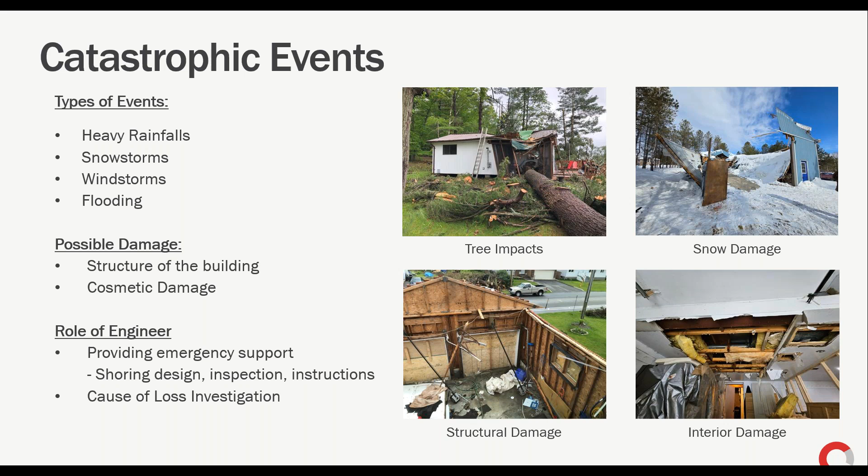Let's start with our first case, which actually happened this year. Last month in February, a large barn in Huntsville, Ontario collapsed after multiple snowstorms. The building was almost 100 years old, a really old building.

In cases like these, assistance from a contractor is really necessary to help with the investigation, because sometimes we may need to temporarily shore or support the building to be able to remove some of the debris and collapsed materials to inspect them. This, of course, costs some money, but it helps the investigation ultimately.

During the inspection, we had a general discussion with the building owner at the beginning, and the owner mentioned that the snow usually just slides off the roof and doesn't really build up, but they stated that the barn just collapsed right after the snowstorms, basically indirectly blaming it on the storm.

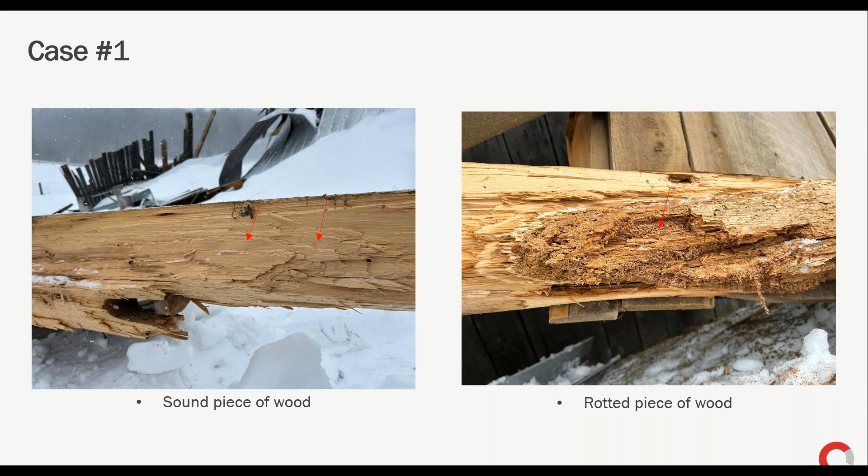By digging deeper into this and doing a more comprehensive investigation, we were able to identify the pre-existing deterioration and decay, and determine the root cause leading to this collapse. The snow load only acted as a trigger, but the underlying issues had actually been there for some time. This case highlights how surface observations don't always tell the full story.

Our next case is actually another snow claim from this year in February. This was a seasonal cottage in Gravenhurst, where the owners only visited occasionally. Their neighbors started noticing that the roof was sinking in some areas, the walls were leaning, and the building looked like it was twisting somehow. So they notified the owners, and when we were asked to inspect the property, we checked how much snow this area got in January and February, because the exact date of the incident wasn't confirmed.

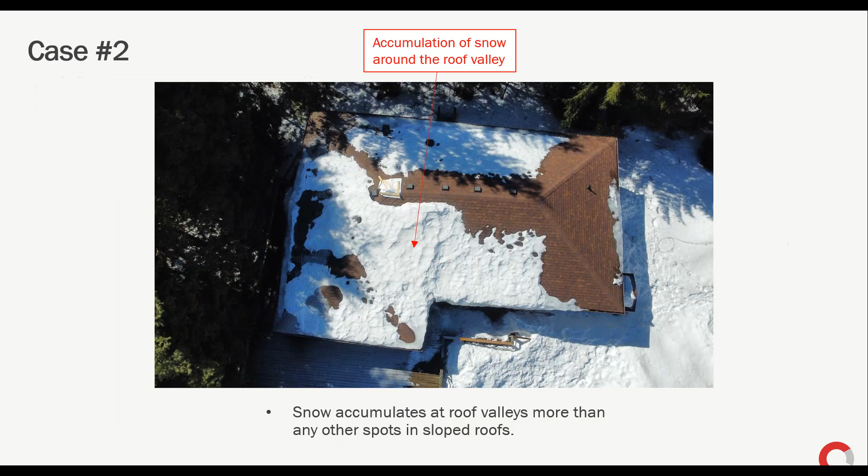Not necessarily. Some trees, large trees, only branches sometimes fall, and even just a branch could cause damage to a building or a roof structure, but not necessarily that certain trees are more prone to fall than others. I wouldn't be able to confirm this for sure, I'm not an expert in trees. Maybe an arborist can. But anecdotally, you haven't seen more of one tree falling than another? No.

This also came in during the first case study: what was the stated root cause of the collapse? Was it the snow or was it the deterioration?

So the stated root cause was actually the snow. The owner made it clear that they are claiming this because of the snowstorms that happened in February. We agree that the snowstorms were actually excessive, we got a very large amount of snow in a very short period of time in February specifically.

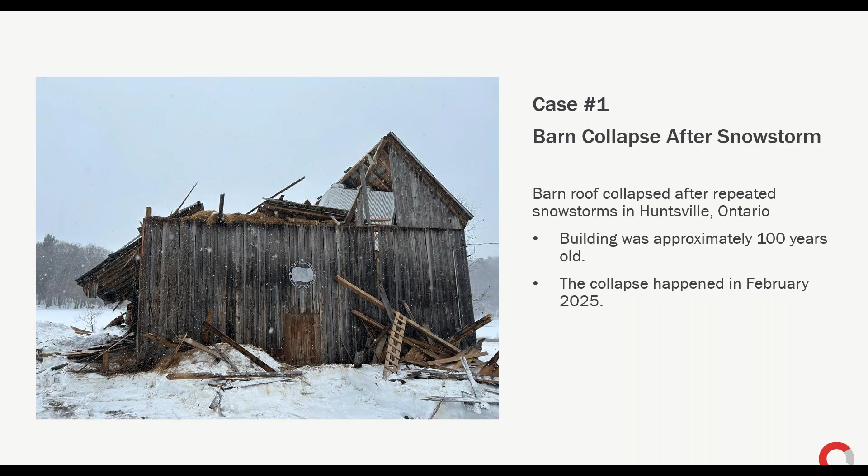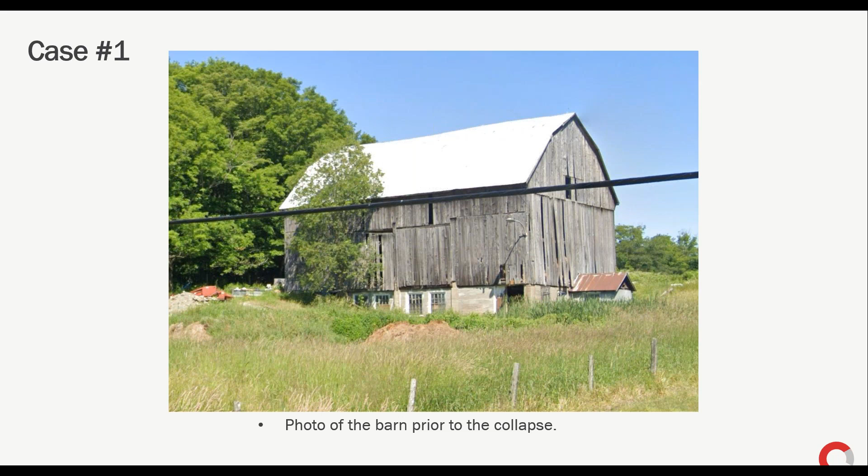But think about it, the building has experienced a very large amount of storms over the years. How come the building just collapsed now? Especially since the roof slope was very steep, as we're looking at in this picture, and the owner himself confirmed that snow doesn't really accumulate on the roof. It's just that the snow would have been a trigger to show all the issues that the building already had.

If the building didn't have all of this deterioration, insect damage and decay, it wouldn't have collapsed. So to be clear, the owner stated that it was due to the snow, but your findings showed that the snow was a contributing factor and maybe the final straw, but not the root cause. Not the root cause, yes. Okay, that's perfect, correct.

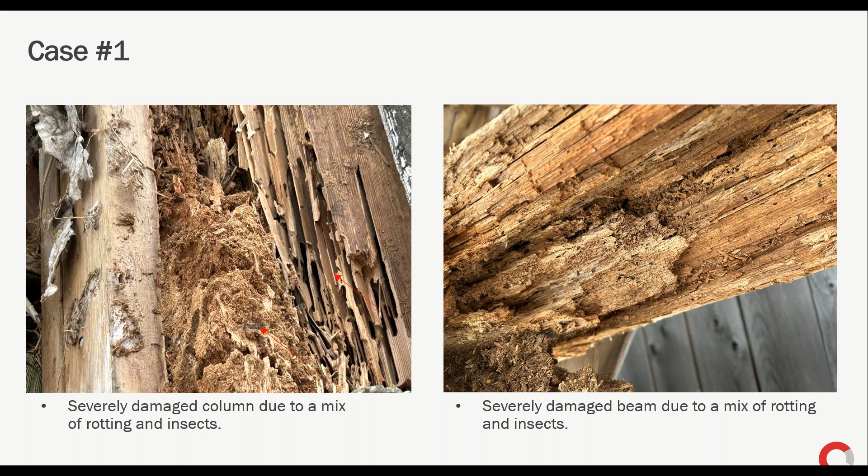This one came in during case study number 2. This might be somewhat anecdotal in terms of your answer, but would you say that metal roofing is better than an asphalt shingle roof for getting rid of snow or preventing buildup? The issue with metal shingles is that they are not very good with low slope roofs.

Metal roofing is ultimately better than shingles in general, and it has a much longer lifespan, and snow slides much faster off metal roofs than shingles. But at the same time, we've also seen cases of buildings collapse even when they had metal roofing. Just to answer the question though, yes, metal roofing is ultimately better, it has a much longer lifespan than shingles, and less maintenance may be required as well. But I think the question referred to whether snow would be more likely to slide off a metal roof and not build up.

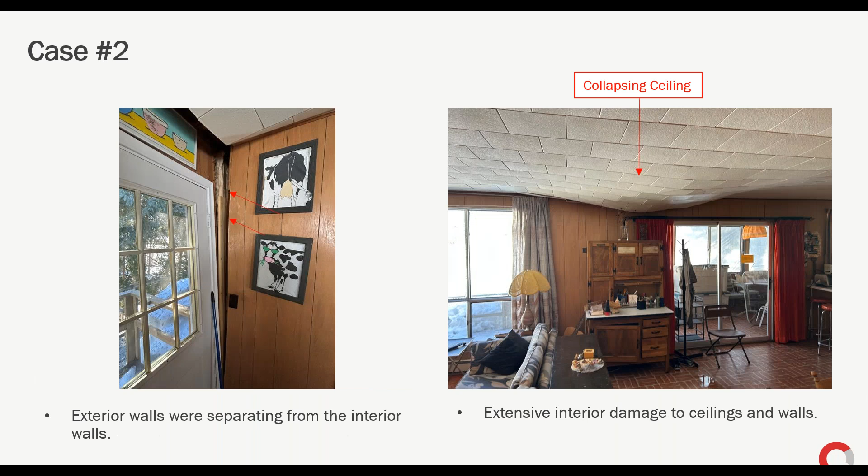Thank you. This is referring to the last case study, the cracks in the foundation. What was the remedy for the house in the end? Unfortunately, the issue is that these cracks will keep extending.

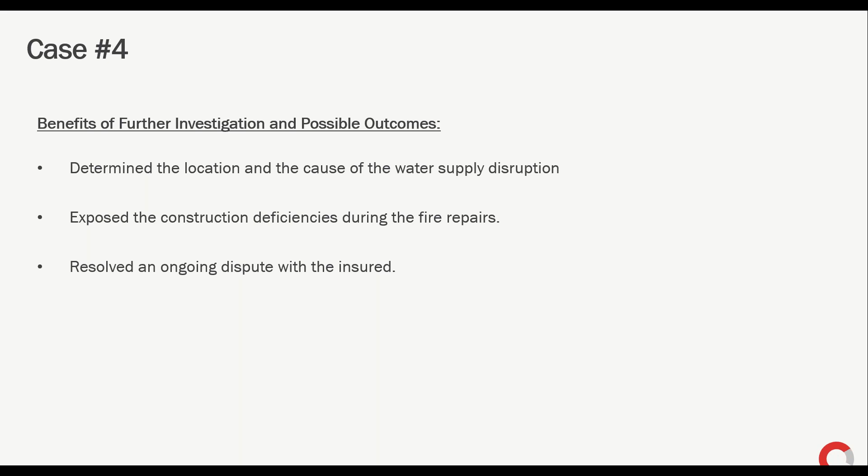If the slab doesn't get changed and a proper slab, thicker maybe or more reinforced, is installed, cracks will always happen, cracks will come back. So the entire slab, unfortunately, would have to be removed and reconstructed properly, which is a major job because this basement was finished and it would have been a large amount of work to do. So the proper remedy is actually to rebuild the slab, which is doable without having to do major demolition in the house. It's just the slab itself would have to be repoured properly because these cracks will only get worse.

Think about it as you'd think about a pool. A fiberglass pool, for example, the only way to keep it in the ground is to fill it with water. So if the pool has no water in it, it will start cracking instantly because it can't resist the soil pressure, and if there's groundwater, it would make it even worse. It's the same for the house and the foundation and the slab of the house. Think about the foundation and the slab as the pool, and the house structure above it is actually the water that keeps it in place. So if there's no resisting load from the house itself to resist the hydrostatic pressure...

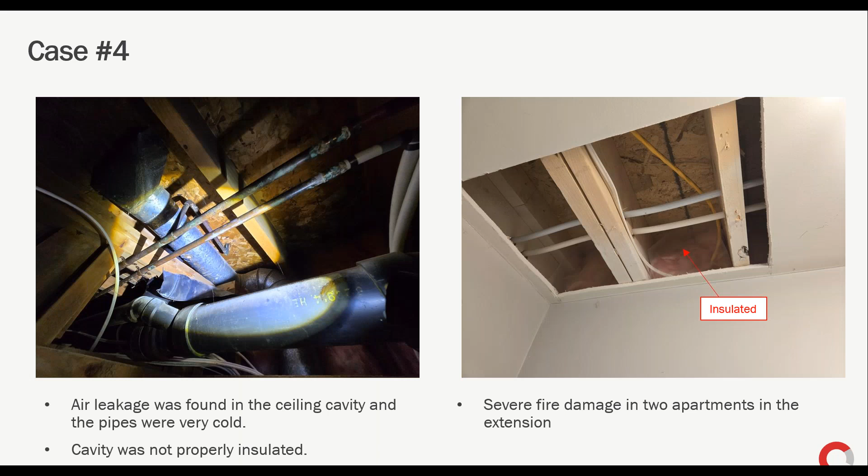Here we go. In the case of the home with the plumbing issue, this is the one with the freezing. Why would this only have started occurring? Oh, I think this is just some confusion here - why would it only have started occurring after 8 years, or was it happening right away? No, actually the homeowner reported that it started happening right away. It would happen every winter, but only when temperatures were very low. But it didn't happen like 8 years after - no, maybe I wasn't clear about this. They said that this was happening for the past 8 years, right after they moved into the house, after the fire repairs were completed.

Okay, yeah, I thought that was what the case was. Okay, thank you.

Case study number 3, which is the drain. The drain, yes, yes.

What was the cause of the damage to the ceiling on the level below the top level? The water, or the drain, was leaking for a very long time. The drain didn't just start leaking in this storm - we actually found mold damage in a lot of the interior walls on this level. So the water was actually draining through the walls and going down into the ceiling below, building up until the ceiling failed and collapsed. Water was leaking into that roof cavity and then moving towards the walls and draining through the walls down to the ceiling below. The mold confirms that this may have been a long-term exposure, not just this specific storm.

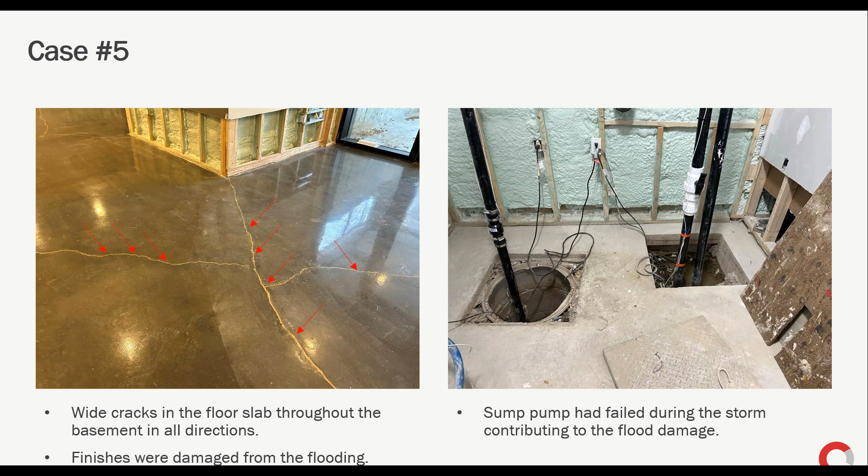Okay great, this one I think is related to case study number 2. Yeah, we had talked about the possibility of a metal roof and snow sliding off, but would freezing rain that adheres to a roof encourage more snow load accumulation as the snow does not slide off as easily?

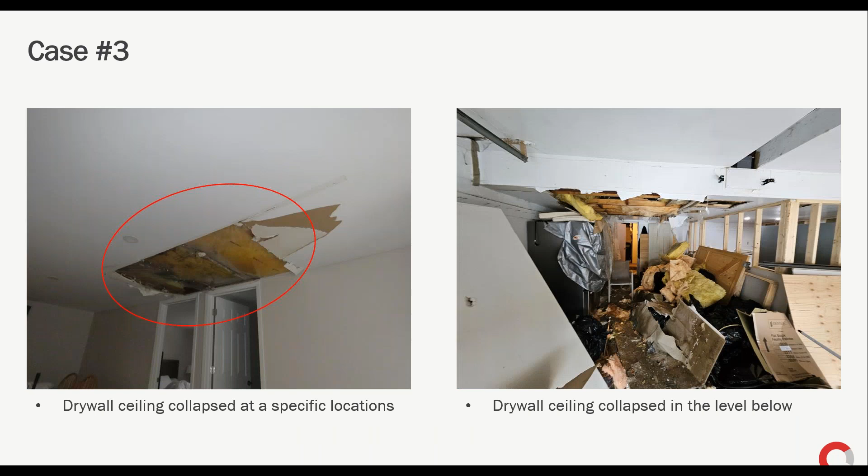If they mean freezing rain like ice damming and ice sticking to the roof, if the roof is constructed and insulated properly, ice damming wouldn't happen. But yeah, ice damming actually is an issue with shingled roofs, because it would stop the rest of the snow from melting and falling off, and it would start seeping through the shingles and cause damage on the interior. So if this question is about ice damming, yes it is an issue, but it wouldn't be a major factor in this case. This case is mainly because of the excessive weight of the snow that accumulated on the roof. Ice damming could cause other cosmetic or performance issues in the roof and ceiling.

Okay, we'll do this one, this is the last one. Again, this is off the cuff, and I'll point to our disclaimer at the beginning that all information in this webinar is strictly educational. What construction recommendations above code would you give to homeowners who are trying to prevent common damage? Again, putting you on the spot here.